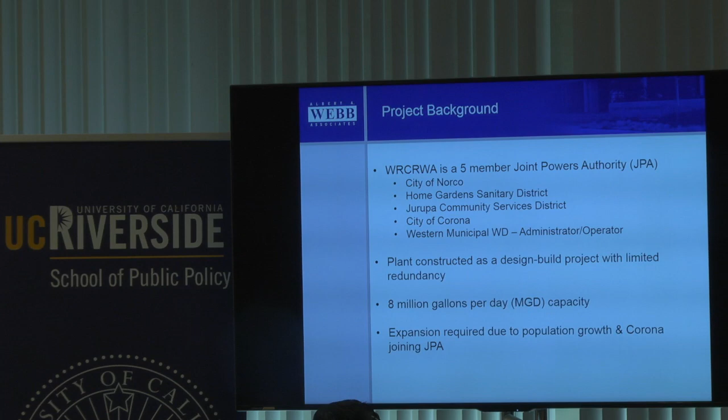So a little background on the project. The Western Riverside County Regional Wastewater Authority, we call it WRCRWA for short. It's a 5-member JPA. The facility is located in Eastvale, right in the southern tip of the city of Eastvale, right about where Prado Basin and the Santa Ana River are located. It's a 5-member joint powers authority made up of the city of Norco, Home Gardens Sanitary District, Western Municipal Water District, Jurupa Community Services District, and the city of Corona. So they jointly own that facility.

Western Municipal is the administrator, so they operate the facility, and they also administer all the finances and cover engineering and things like that for the facility. But they all work together and jointly own it. They all have different capacities, ownership there. The plant was originally built as a design-build project. This is a delivery method for the design and construction of the facility. One of the challenges that it faces is very limited redundancy in the plant itself, and we'll talk a little bit more about that as we go on.

It has 8 million gallons a day capacity at the facility, and the drivers for the additional capacity were really growth in the service area, the build out of Eastvale, some additional areas in western service area, and then the city of Corona decided they wanted to buy in to that facility so that they could increase their capacity for their future growth and switch around some things at their treatment plants. So they wanted to join in.

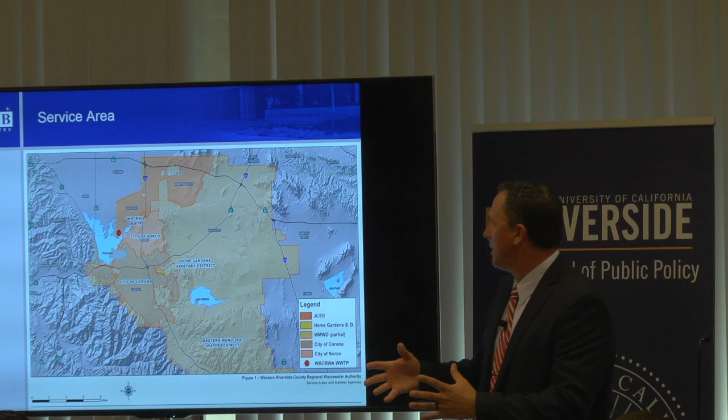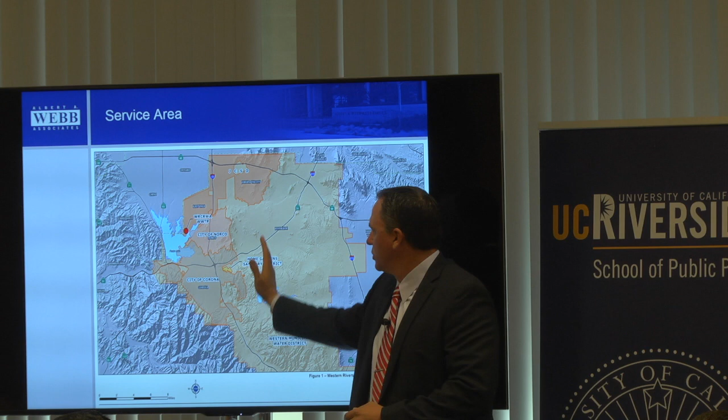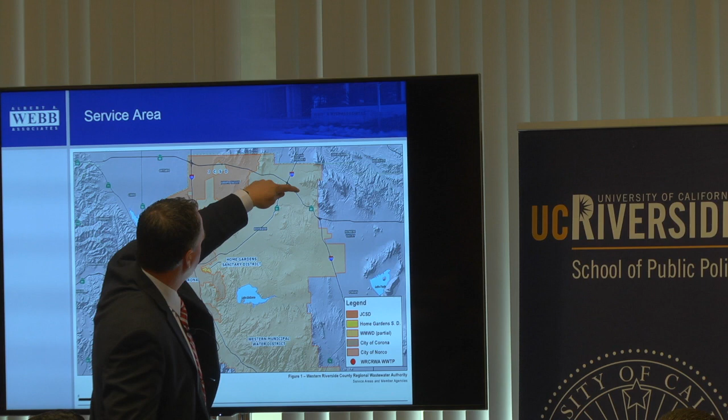So service area-wise, most of you are probably kind of familiar, but the plant sits here at the south end of Eastvale, serves all of Eastvale, all of Norco. It will serve a part of the city of Corona, and then Home Gardens Sanitary District, a little small district there, and then a portion of Western's service area. So UCR, 91, 215, we're like right here, right? We're right up here at the northeastern portion of Western Municipal's service area, okay?

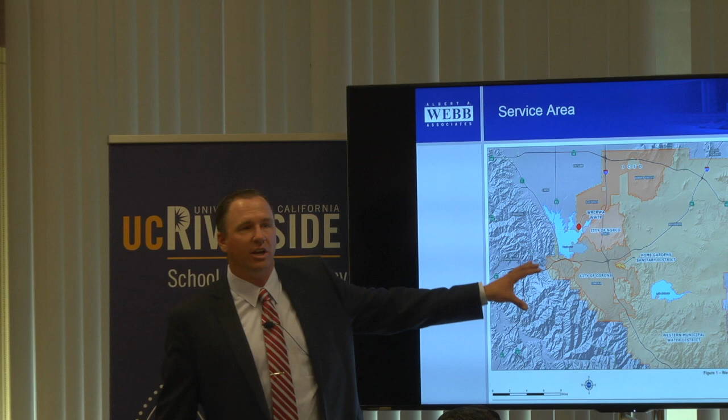So as far as recycled water goes, where do they have facilities? Who has recycled water? The city of Corona has a very robust and advanced recycled water system from treatment and distribution. They also do groundwater recharge. They have recharge basins where they take excess water that's not being used for irrigation and they put it in the ground. It's not direct to their potable water system, because it's downstream of their wells, but they do support the groundwater there.

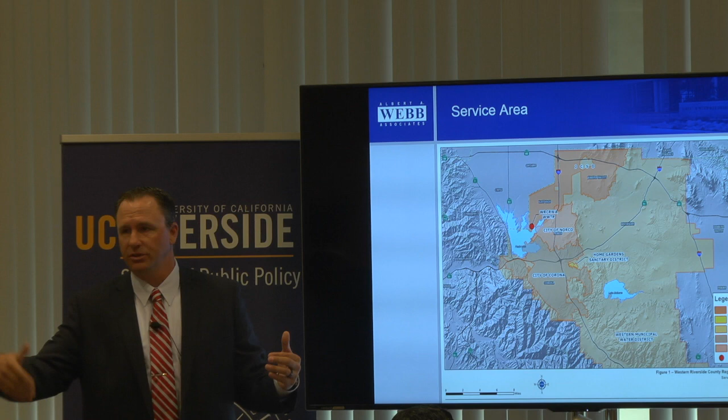The city of Eastvale has huge needs for recycled water, but they don't currently have any recycled water infrastructure. Any of you who have been to Eastvale, there's parks, there's open space, there's lots of areas with need for recycled water, but they don't have recycled water infrastructure in the ground. A lot of their parks are either on the potable system or on non-potable wells that are drilled with high nitrates. So they have a big need there.

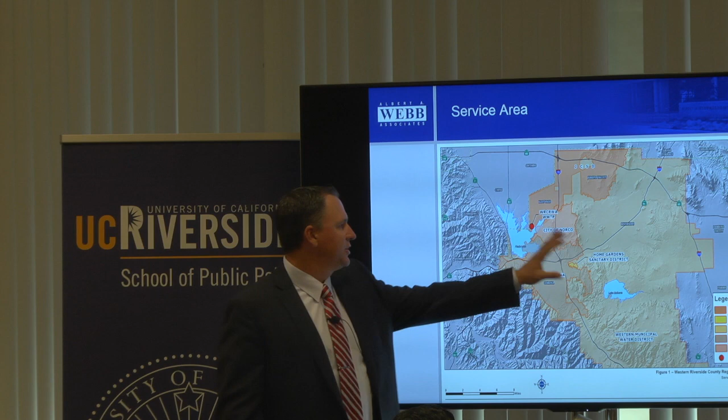The city of Norco has needs for recycled water throughout their service area. And then Western and Home Gardens really don't have any need in their adjacent service area for recycled water, not a lot of demand. So those are the players who really want the water and need the water and can use it to offset potable water demands.

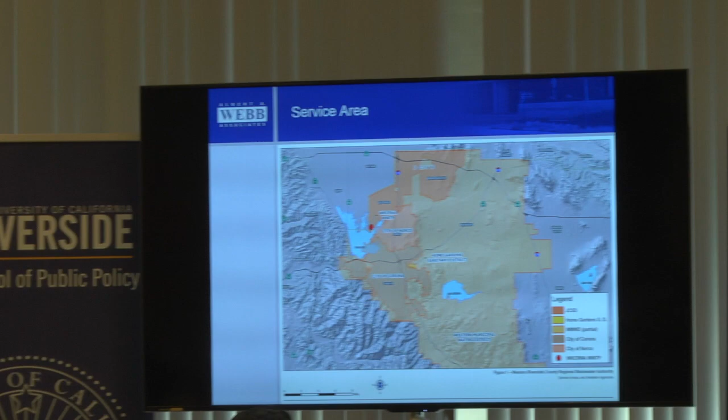So some of the regulatory framework, you may be familiar with Title 22. California regulations, Title 22, govern the production and use of recycled water. It contains the treatment requirements for producing recycled water. It also contains the redundancy requirements, what you have to have in order to be able to produce that water, and then also monitoring. The monitoring and redundancy are really important.

As you're producing recycled water, you have to continuously monitor it, make sure it's meeting the water quality standards. If it's not, you have to be able to shut it off right away so that water that's not meeting the requirements and standards isn't going out into the system and potentially subjecting residents to contact with water that's not meeting the standards.

One of the other issues that we faced at this facility was this change of use petition. Historically, the water is treated and then discharged into the Prado Basin and into the Santa Ana River, downstream into Orange County. In order to pull that water out, the owners had to go through this change of use petition with the state board to be able to utilize that water and pull it out for their own beneficial use. They've just recently, within the last week or so, gotten approvals to do that.

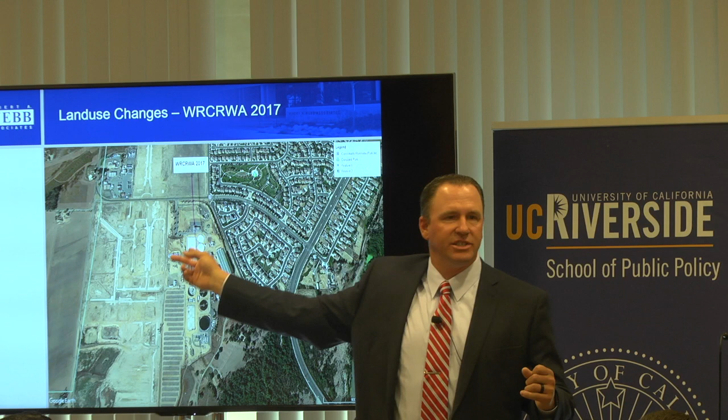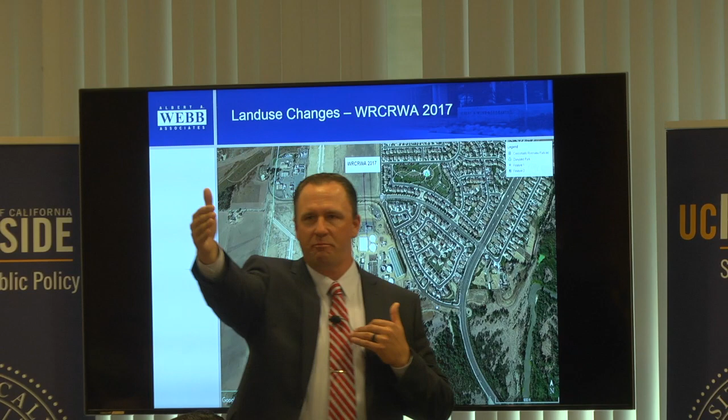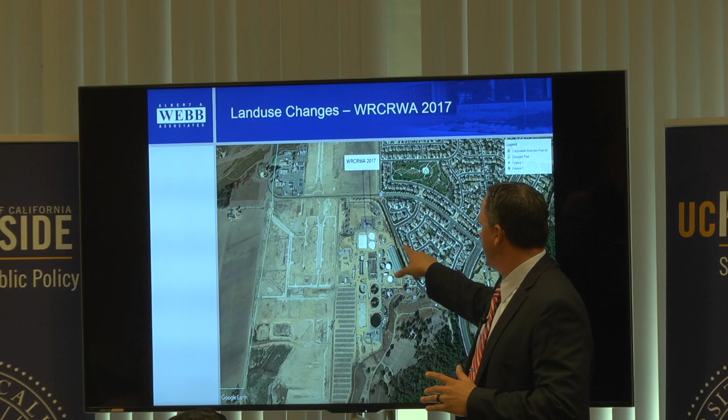This is county, and nobody bothered to tell the wastewater authority or the city of Eastvale, apparently, though this is before Eastvale was incorporated, the wastewater authority that they were going to build houses like literally from me to the back of this room, away from some of the stinkiest parts of the treatment plant. Okay? Like I said, I'm not here to say whether that's good or bad or indifferent. It just is. But it's a problem when you let people move in to this house right here and this house right here, and you don't tell them that that's a wastewater treatment plant that smells.

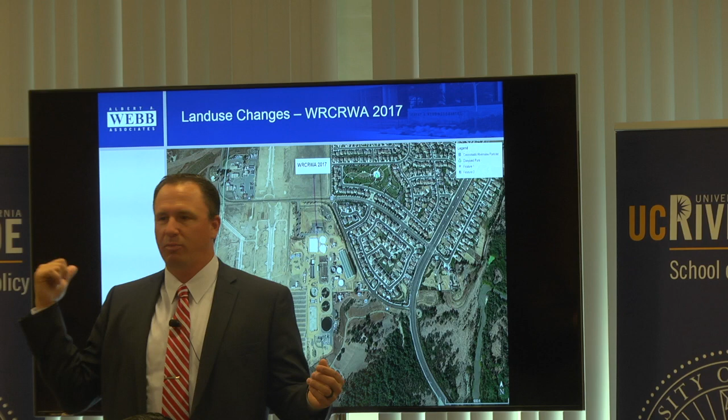And their disclosure statements say, you're living next to a water purification facility. It's true, right? To some degree. Right? But really not totally honest. Okay? So in the middle of our project, we have neighbors moving in and go, oh my gosh, it smells terrible. Like, well, yeah, you know what that is, right? Well, I don't care, right? And the public doesn't care that they just bought a house next door, and someone might say that that's a bad decision. But California law doesn't allow you to negatively impact your neighbor like that.

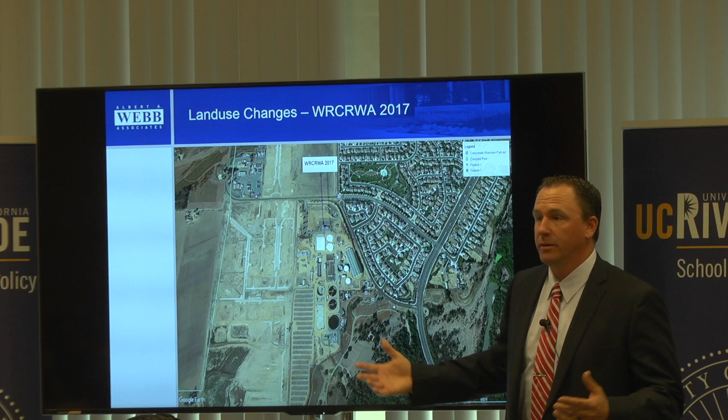So the ratepayers who built this facility and are paying for the new upgrades to it got about a $6 million extra bill in order to try to build odor control facilities into this treatment plant, okay, that nobody was really planning on because nobody knew that they were going to build these houses right here. Okay? So land use decisions have impacts that go far beyond what sometimes is considered in a council chambers. Okay? And these are important things that happen that you then have to deal with.

And they've been dealing with this problem ever since they moved in. They got sued, right? They're going through the process, trying to figure it out. We're trying to implement solutions. They say, well, we don't care. That's not good enough. And it's in this continuous, maybe forever problem because the decision was made to allow these two uses too close together. So the existing plant, this is it. I want to just show you kind of a preview of what we did to improve it.

And this is where it gets maybe a little bit more technical. But I think as you understand what it takes to design, construct, to implement a project like this, it'll give you a better understanding and a better appreciation maybe for the things that you end up approving or the things that you end up pushing forward and saying this is a good idea and this is how we're going to do it.

And the more you understand about it, the better you can explain to your public about why we need to do these things and why maybe it's difficult, okay? Instead of the policymakers saying, we're going to do these improvements and we're going to fix the smell, not really understanding what that statement means, right? So I want to show you what we ended up doing, so as we talk about it, it'll make a little bit more sense from a visual standpoint.

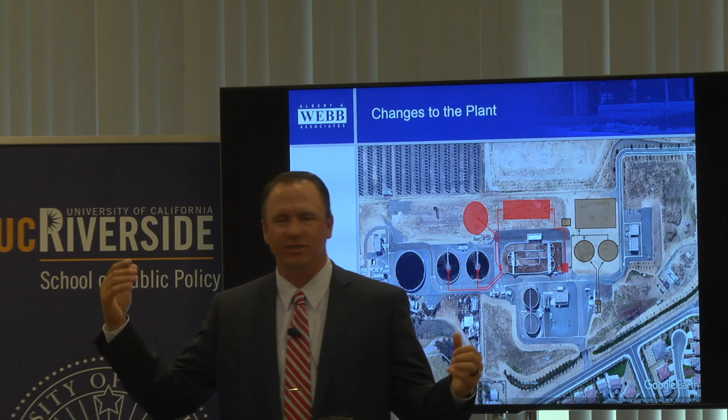And so, anyways, this aeration basin, this is where the real heavy lifting of the treatment process happens. And there's microorganisms and bugs and bacteria that just love your feces. They love it, right? And the only thing they ask for is more of it and oxygen. That's all they want. And they consume it, and they eat it, and they help us clean up the water. And that's what happens here in this process, right? And you can be infatuated or you can be sicked out. It's all the same.

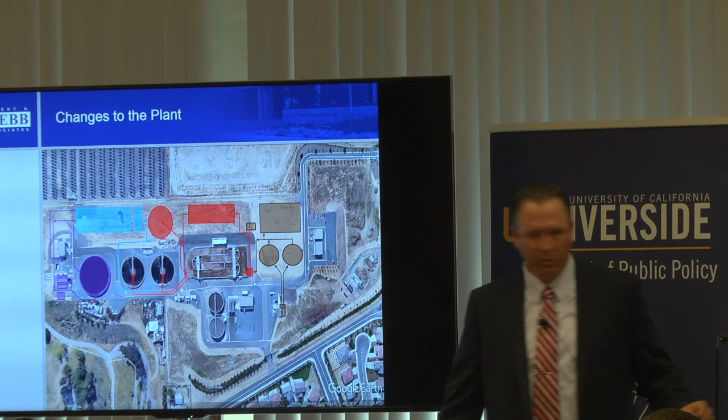It all happens. Then from there, there's tertiary treatment, and this is where you get into Title 22. You have to go to tertiary treatment. So we filter the water, and then we disinfect it to a level that the state of California has determined to be safe, killing viruses, microorganisms, the things that will make us sick. Those were recycled water facilities. We're implementing a pump station and a tank to be able to distribute the recycled water. And then we did several changes to their solids treatment and disposal systems, and that's what all this is.

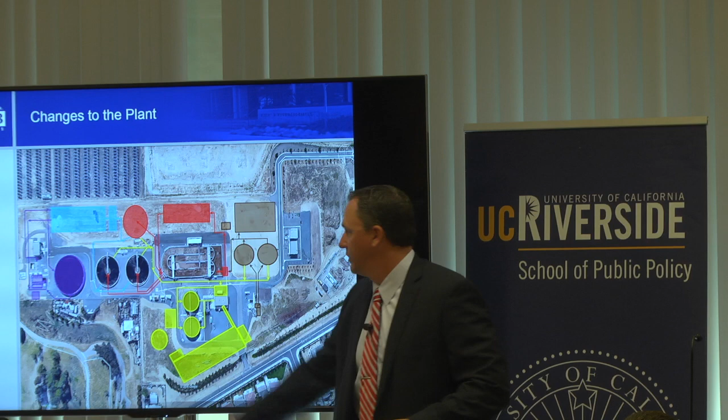So one of the things that's important to understand is how do you execute a project like this? It's not simple. Like I said, I started working on this project in 2011, and we're just finishing it now. Okay, so this is 6 solid years of planning, design, funding, construction, and then getting the whole facility started up. So just to make it simple, looking at what are the steps that we go through in order to do this.

One is determine the existing capacity. What's there now, right? What do we have? And then what do we need to do? We need to understand the owner's needs. Each one of those 5 owners has different needs. They're not all the same. We need to understand what those are so we can develop a solution that satisfies each one of them, okay? Then with an existing plant like this, you have to integrate it into the existing operations, and then review of constructability. Sort of like if you're driving down the street and you decide that you want to take apart your seatbelt and put it back together while you're driving, right?

You don't get to stop, pull over, do all that stuff, and then restart again. Because every day, people are flushing their toilets. Every hour, every minute. You don't get to tell everybody, hey, stop for 2 years while we're doing this, and then come back. You have to do it on the fly, live, with people still living in their houses, and they don't want to hear about a disruption in their service, okay? So integrating with operations and being able to build it.

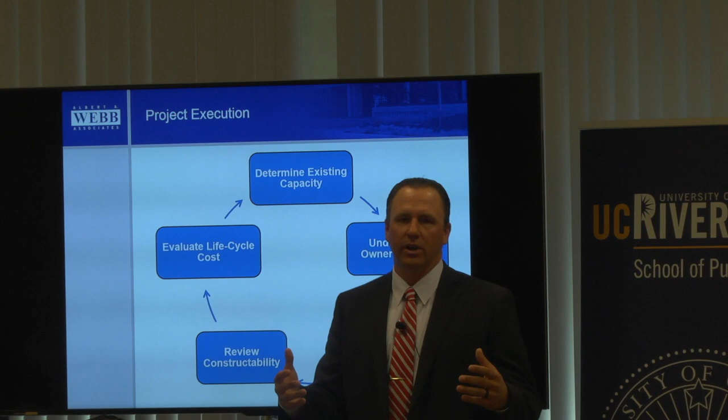Some of them are really good ideas. We came up with great ideas, but we couldn't build them without stopping operations at the plant. So that's off the table. We can't do it, right? We came up with ideas that were really good, but they cost too much, okay? So you just got to go around and around this circle until you get to a place where you've satisfied at least enough of the concerns, enough of the demands that you're ready to move forward, okay?

So I'm going to talk a little bit about each one of these things, and I've got some examples of things that we did and looked at as we went. So this one's existing capacity. Each component, what's its capacity, right? So then we know, okay, on the headworks screens, they can do 8 million gallons a day. Well, that means we need more screens in order to get to 14 million gallons a day, and so on. So we have to come to a basic understanding of what do we have, and what do we need.

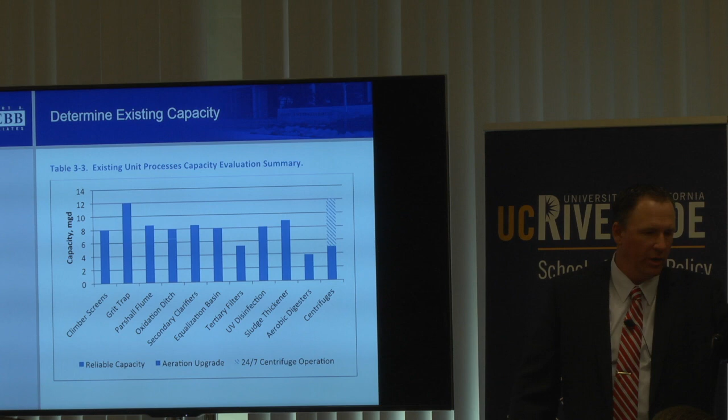So then understanding the owner's needs. As I said, each one of them had a different driver for what they needed, okay? So Home Gardens, they needed just a little bit more capacity. They're kind of built out. City of Corona had no capacity, but they wanted 2.5 million gallons a day so they could offload some of the flows at their facilities. Norco needed a little bit. JCSD needed to plan for the entire build out of Eastvale, so they needed more. And then Western said, we're good, we don't need anything.

So then satisfying all of their demands and all of their needs with then how do you pay for it? How do you structure a deal so that they're all happy with what they're paying? Just another complication of having 5 owners.

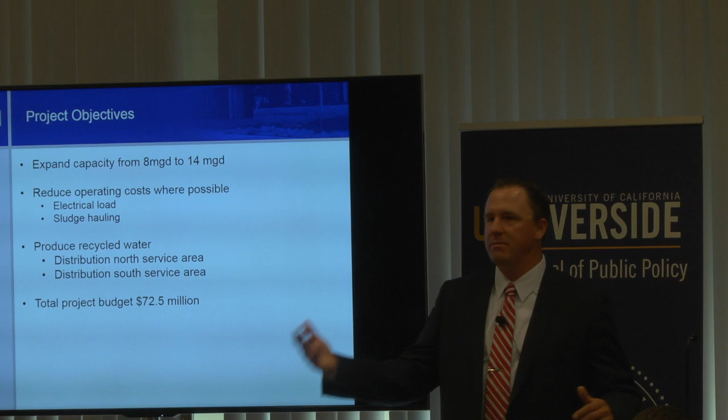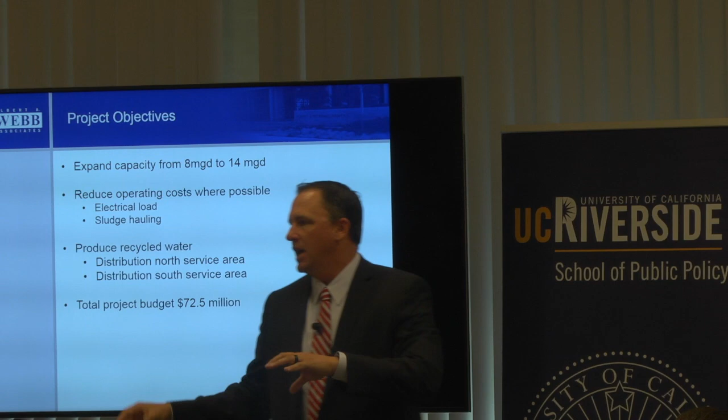So I said the project objectives were to go from 8 million gallons a day to 14 million gallons a day, reduce everybody's user cost, and then produce recycled water for the north service area up into Eastvale, and the south service area, Corona, Norco, being able to get water down into both of those. And then we're given a budget, $72.5 million to accomplish all of that. That's what you've got to spend, okay?

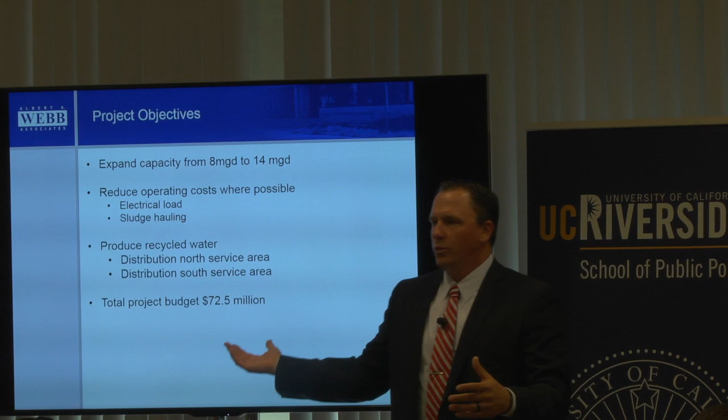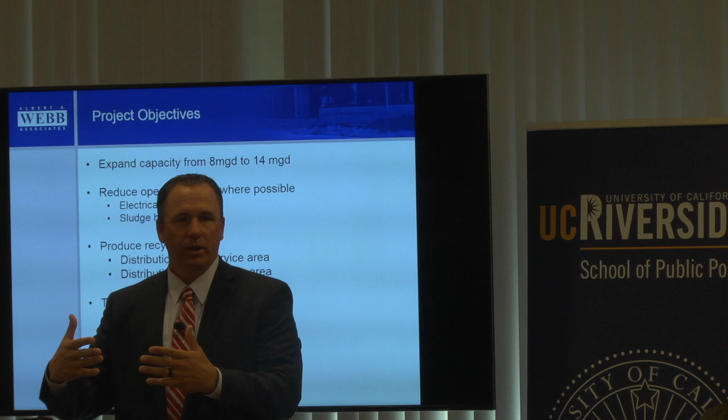So with a given budget like that, that's given to us based on policymakers, decision makers, this is what we can do. So then every decision you make has to fit into that framework. We say, well, we'd really like to do this, but that gives us a project cost of $80 million. It's out. We can't do it. So you've got to do the best you can with the budget that you're given and maximize all of those different constraints. So as I said, integration with operations. This one's crucial in an existing facility.

And as I said, as a policymaker, understanding the complexity of a facility like this will really help you sell or explain to your constituents, to your public, why it's important, okay? If you've never been to a wastewater treatment plant, if you've never had your customers go to your facilities, it's hard for them to grasp why this is complicated and why it's hard to do and why it's expensive. They say, $72 million? That's crazy, right? But that's what it takes to do something like this.

So this facility, as I said, had limited redundancy. This is the oxidation ditch. Basically, this is like a slurry mixture of what looks sort of like frothy chocolate milk, but it's not. Okay? And it goes in a serpentine fashion, aeration, right? The bugs are in there. They're consuming everything that's in there, right?

Doing their thing. This is the only one of these that they have at the plant. It can't go offline. It has to run 24/7, no questions asked. So we needed to do upgrades to this. We needed to fix this and improve the aeration system. We started figuring out, how are we going to do that?

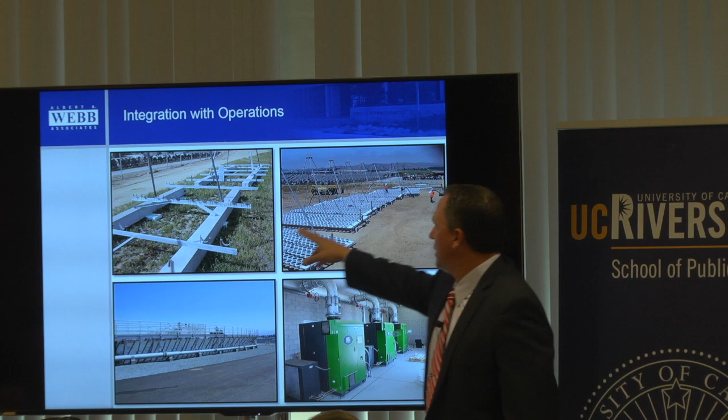So we came up with a design, and we put these on concrete ballasts so that we could take them, set them in while the water's still running, and they would sink to the bottom and hold themselves down there. So we had to get everything all prepped and ready, blowers in, piping in, these all built. And then we came up with a problem.

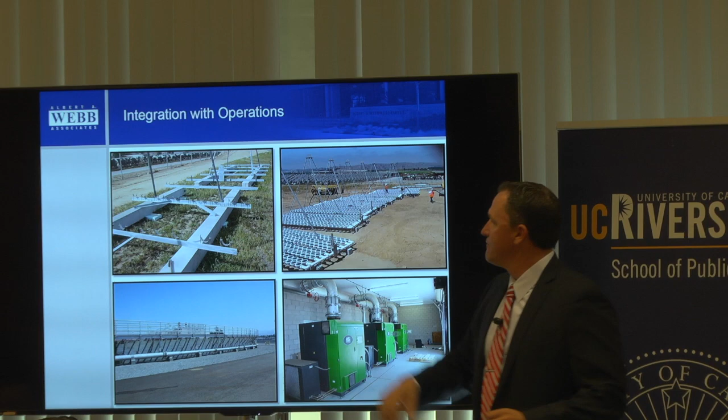We thought to ourselves, how are we going to test this to make sure it works before we put it into the dirty water? Because once it goes in the dirty water, it's dirty, right? And you take it out, and then you got to clean it off if there's a problem with it, and nobody wants to go touch it. So how are we going to do it? We got to test it outside.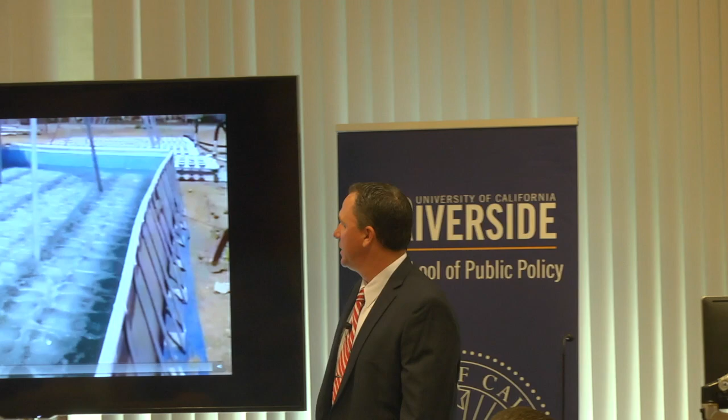So you put your heads together, and you start thinking, and you say, we built a little pool, right? And so very simply, we put them in the pool, we hooked them up to the air, we could check every one of them, see if it was working, if there was a problem. If there was, we could tighten it up. It's clean water. Nobody's upset about that, okay? Then we had to put them in.

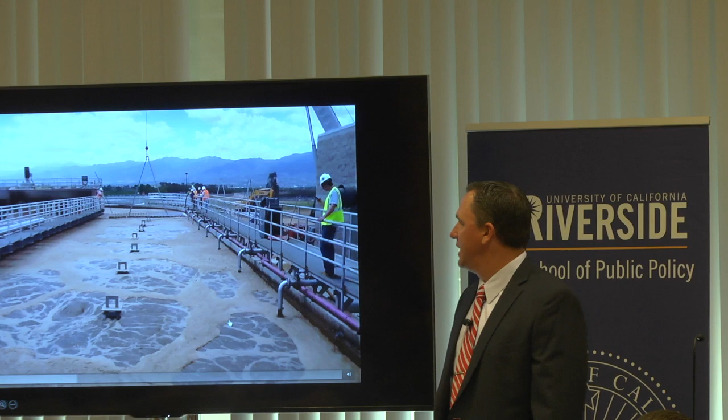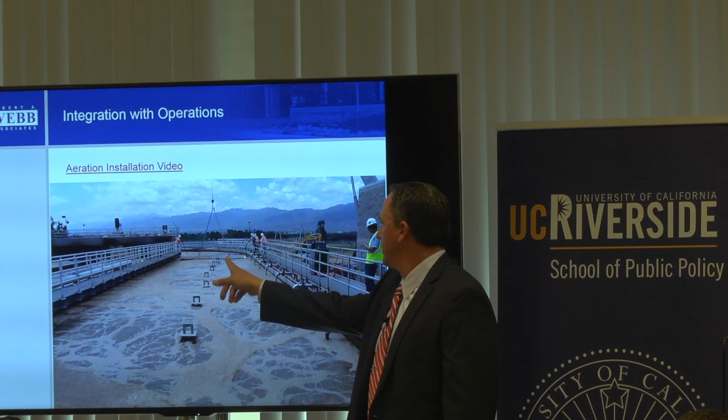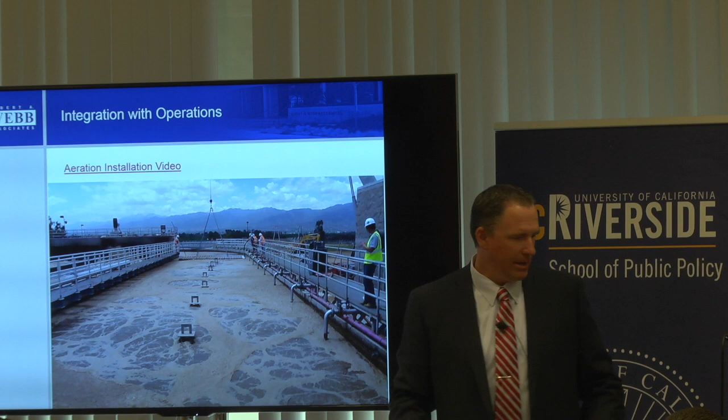This was the day that they went and did their installation. Every one of these is one of these diffuser grids that they're installing into the oxidation ditch. And then they would hold this hose, and they would plug it in to the air header, connect it. We were able to do this live in one day. They were able to set all 19 of the diffuser grids, turn them on, and get it all set up in one day without taking the ditch offline. Which was a major task and a potential problem for the project.

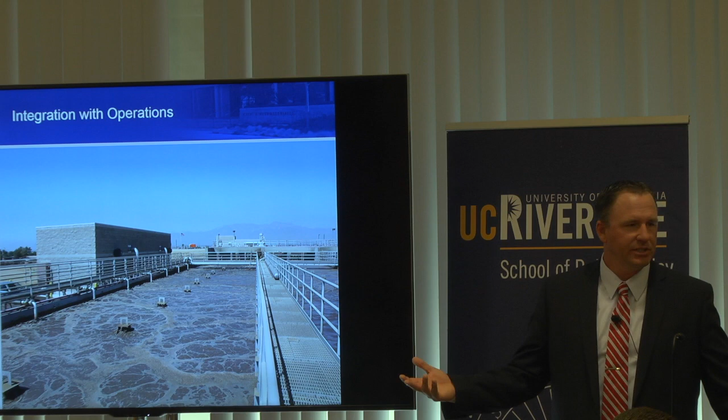This is what it looks like now. It's all done. So the same is in reverse. When they need to fix one of these, they can't take this whole thing offline and drain it. So we made it so that they could set a crane, and they've got a bar that they hook this up to, and they can pull those out and fix them when they need to without taking the whole thing out of service.

So there were other areas where we had to integrate with the operations. We had digesters. So you have biosolids that get taken out of the water, right? As we clean the water, we're taking the dirty stuff out, and we got to do something with that. So we have digesters with more bugs and more biology that consume these. They turn some of it into methane gas in these digesters.

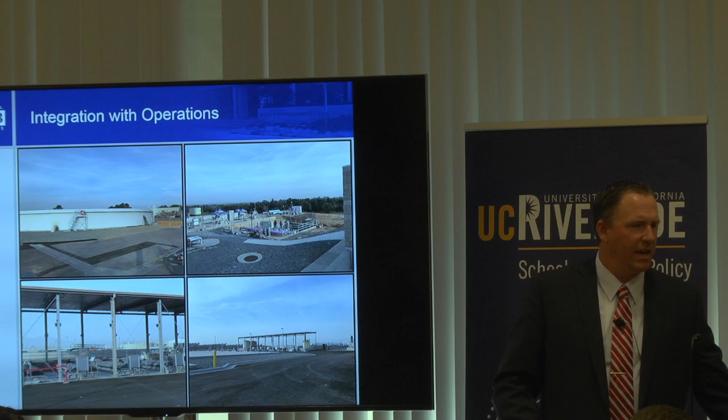Well, we had to convert these, cover them, do all the improvements, again, live. So we took one off and fixed it all up while the other one was running. We put the new one online, took the second one offline, fixed it all up, and then put it online and sequenced it that way, and had to work with the operations group to be able to do that. There's just a few more places where we had to do that.

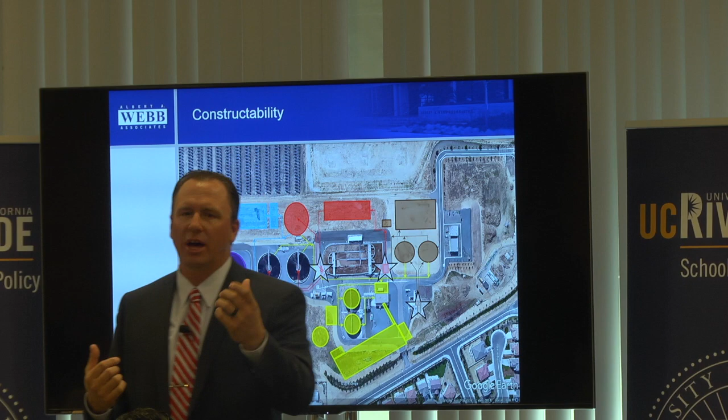Okay, so this is one that you start to ask questions. Me as a supervising engineer, I ask our team, and you as a public policy maker, as a decision maker, should ask this question: have you thought about all the places where you are connecting to something else? In my experience, this is where the problems, not all the time, but most of the time, come from. When you're connecting to something else that's already there.

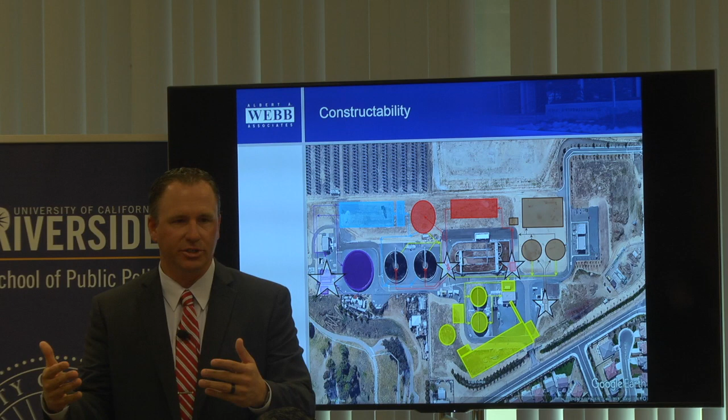And so I tell my team, at each one of those points, you have to have a good solution for how we're going to do that. You don't have to have 100 good solutions. You just have to have one, at least one. If you don't have at least one, then what happens is when Mr. Contractor comes to build this, he says, I can't do it. And you go, well, yeah, you can. And he says, well, how would you do it?

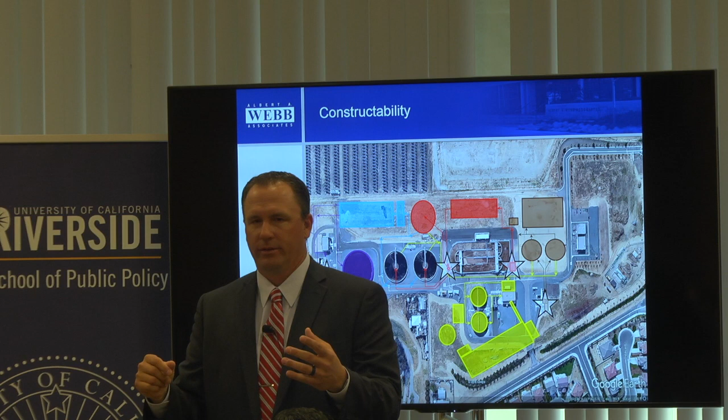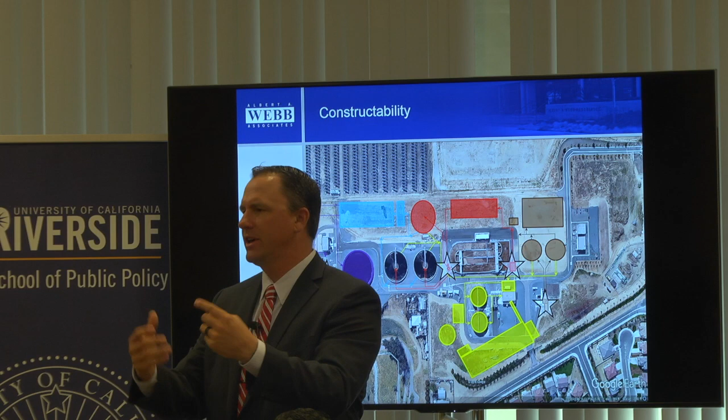And if you don't have one good answer, one plausible way to do it that's realistic and doable, then you just basically took the owner's wallet and laid it on the table and said, okay, Mr. Contractor, how much is it going to cost? So I tell my team, you have to have one good way, at least. Hopefully you have more than one, but you only have to have for sure one in order for us to be able to get through this.

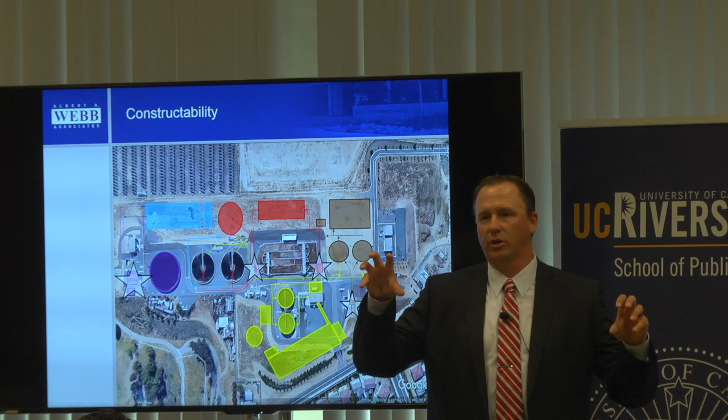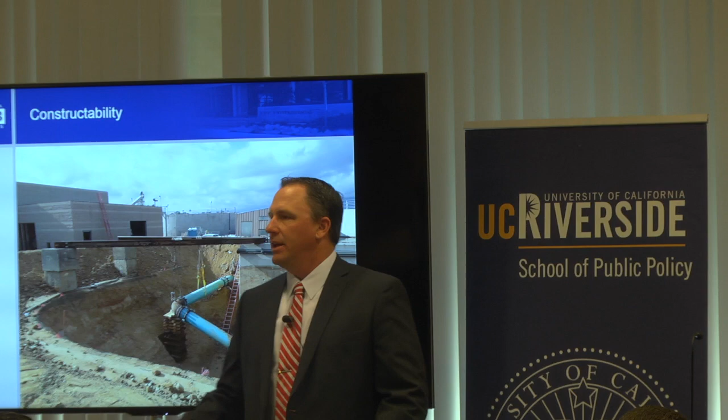So we had 4 of these spots at the treatment plant that were really critical, where we had to connect to something that was already there and already in operation. And how are we going to do it? And we had a way for each one of these things. One day I'm sitting in my office, minding my own business, and I get an email from the construction manager out at the plant, and he says, hey, check out this picture. What do you want us to do?

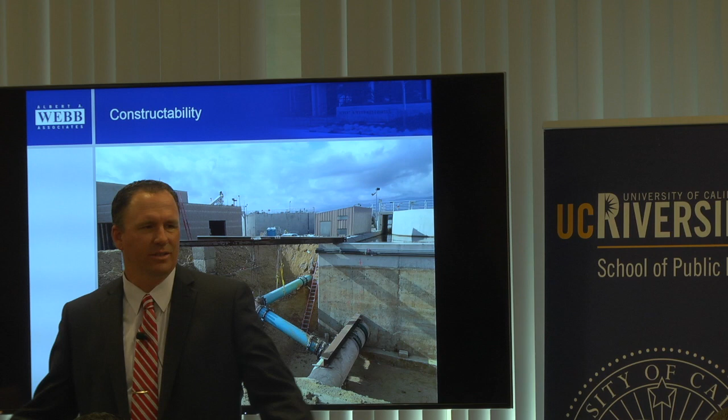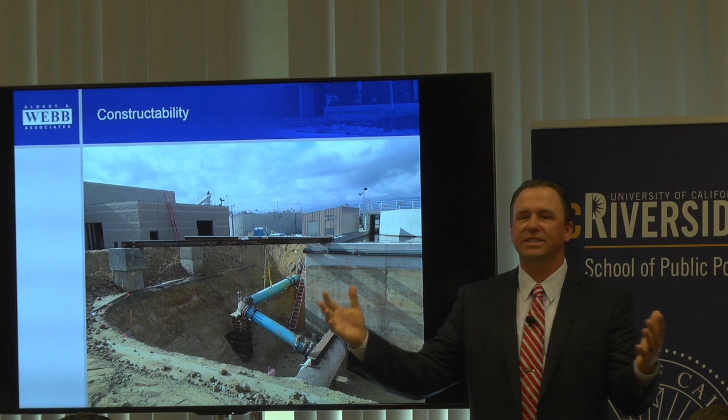I'm thinking, that seems kind of simple. I get stuff like that all the time, right? So I click on the attachment, I open it up, and this picture comes up. It's probably not scary to you, just looking at it, but very scary to me. So this pipe, this one's 42 inches. This one is 20 inches in diameter. So this is a big pipe. Inside of this tank is 6 million gallons of untreated wastewater.

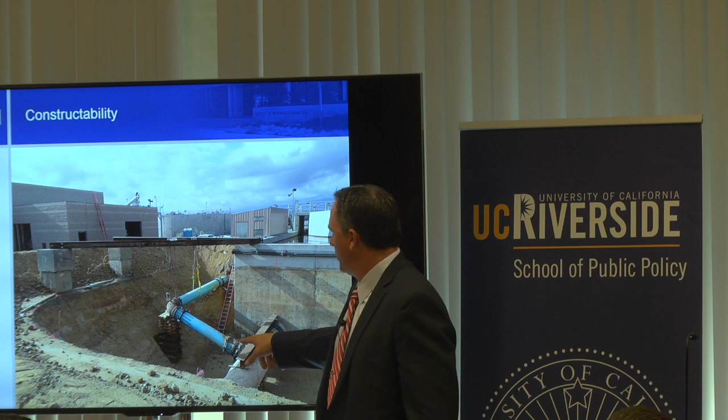This pipe was hanging here. This is actually a picture a little bit later; they had put the straps on. This pipe was actually hanging in the air, totally unsupported and not restrained. Which means at any second, it could have come apart and it would have drained essentially the entire contents of that tank out. 6 million gallons of raw sewage spilled out to wherever gravity wanted it to go.

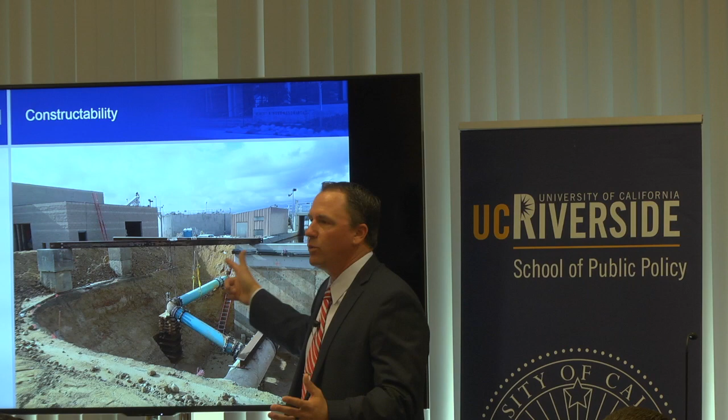And I pick up the phone immediately. Like, what in the world are you guys doing? You've got to restrain that pipe. That is unacceptable. So they went and they quickly did this. The problem, we thought, is that in the old plans, this was all underground. The old plan said that that was a steel pipe and it was fully welded and connected, which is very stable, very safe.

It turns out it's a ductile iron pipe with push-on fittings that are not restrained and can pull apart if there's enough pressure on them. And if that pulls apart, you're not stopping it until it's done. There's no, oh, we'll just go in and fix that up. No, you get to stand back and watch it go until it's done. Scary. These are just things that happen, and you thought you did a good job, you thought you knew the problems, you thought you knew the risks, and then you find out that you really didn't know.

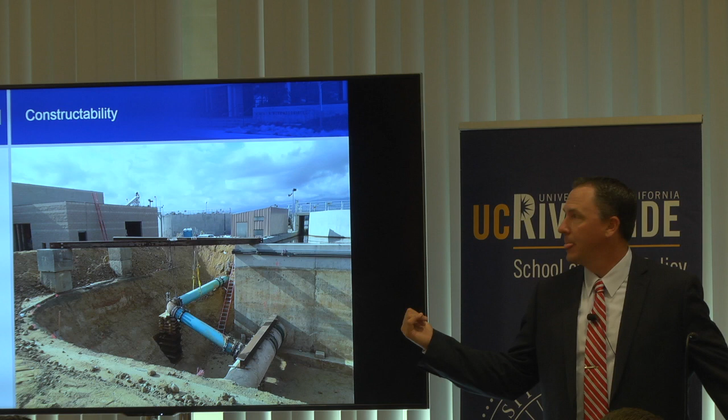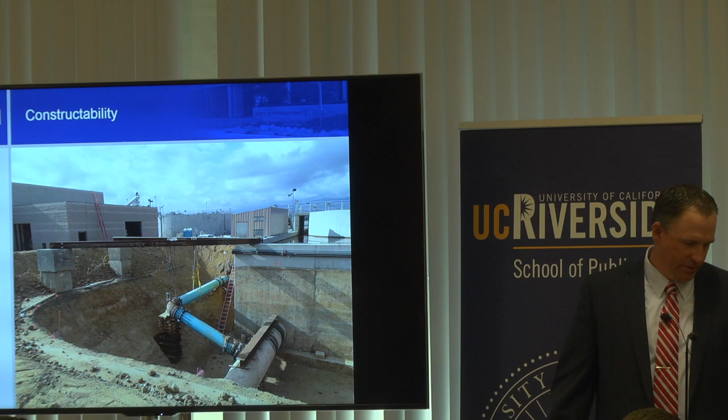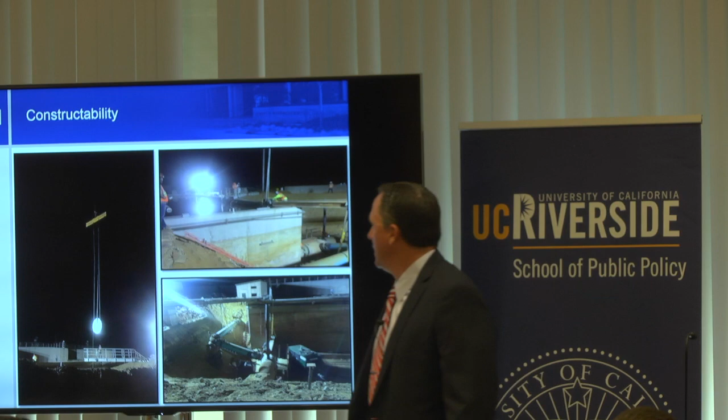So we had to get in, and we had to plug this line so we could disconnect this line. So how are you going to do that? Well, you go in at night, you get a crew together, and you've got to get this big 42-inch diameter plug down into the hole that's 16 feet below the water surface and plug that line. So how do you do that? You get this guy to come and take a swim. Right?

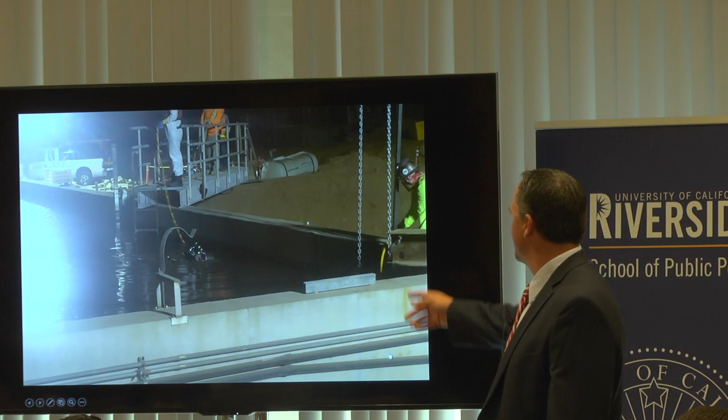So this guy shows up, and we tell him what we need him to do, and he's like, okay, no problem. And he takes a swim and goes over. You'll see him, he kind of bobs and makes his way over in his scuba suit, and he drops down to the bottom and pushes that plug in so they can inflate it and stop the line.

Funny, I talked to that guy after, and I was like, that's disgusting. And he says, oh, that's not even close to the worst of these that I've done. Okay? So he goes all around the world and does ridiculous things like this that nobody else probably wants to do, right? But I'm super grateful that there's somebody that is willing to do that, because we needed him, right?

But he told me that he went deep diving on oil rigs, okay? And he would have to go down in this pod, and if you're familiar with how the diving works, you go down, you have to get acclimated and everything. You can't just come back up. They put him in a pod, and he lived in this pod hundreds of feet below the surface of the ocean for 30 days at a time.

Right? That sounds awesome, right? It's like a little pod. I said, well, what would you do? He said, I would work for 12 hours straight, and then I would come back to my pod, and I would sleep, and then I would go back out. And he had a partner, and they would cross paths every 12 hours or so and go back and forth for 30 days. He's like, this, no problem. It's just a little sewage. It's fine. I'm not stuck in a bubble for 30 days, hundreds of feet below the ocean.

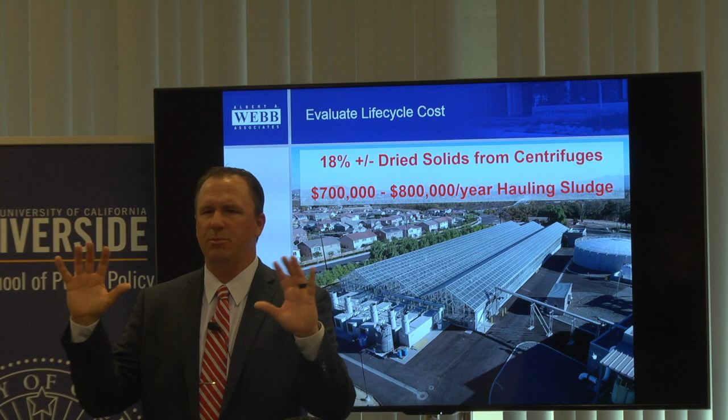They're hauling it off. So one of the things that we recommended to them was, let's dry it. So regular solids like this, they come in, if you think about just easy percentages, okay? 20% of it, roughly, is the solids, right? It's the stuff that we put in. 80% of it is water. So they're paying $800,000 a year to haul, basically, water to Arizona. That seems like a bad idea, right? Like, why would you do that?

Okay? Well, so we talked to them, we convinced them that we should put in these facilities to further dry the solids, and so we're flipping the economics, okay? What we want to really haul is the waste product out, not the water. We'd like the water back so we could use it for recycled water and other things, okay? So we implement this drying technology, these greenhouses that automate the drying process. Basically what we do is we flip the economics, and we get about 80% dry solids and 20% water, right?

And we reduce the cost down to about $250,000 a year, right? So they're saving $400,000 or $500,000 a year in just hauling costs, hauling off what they really need to haul off, and we're getting back all the extra water that was tied up in those solids. Now we can treat that and produce more recycled water, okay? So just a more holistic, more sustainable approach to part of the treatment process, okay? Get rid of what you need to get rid of, but don't send away the good stuff that you want, okay? But it costs a little bit more to do it. But there's positive paybacks based on the savings, okay?